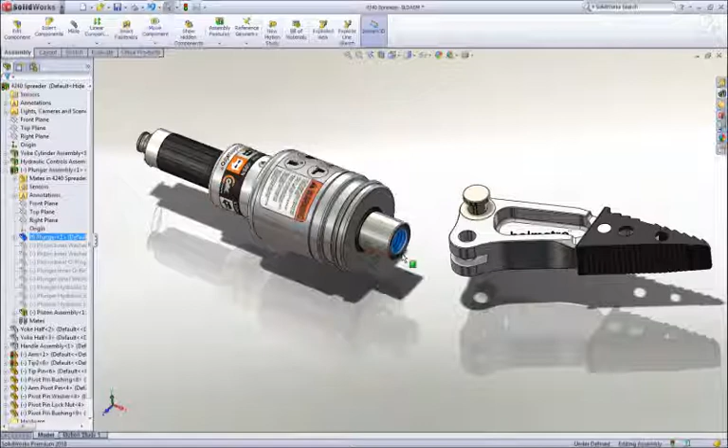We'll create a part, assemble several parts, and create some drawings. We'll start by designing a new rod end part to connect the piston rod to the spreader arms.

The basic building block of a 3D solid model is a sketch, and sketching in SolidWorks is extremely easy and intuitive. Using a mouse gesture, I get access to my most commonly used commands. Draw a slot, add some dimensions to establish its size, and then drag the center of the slot onto the origin to locate it.

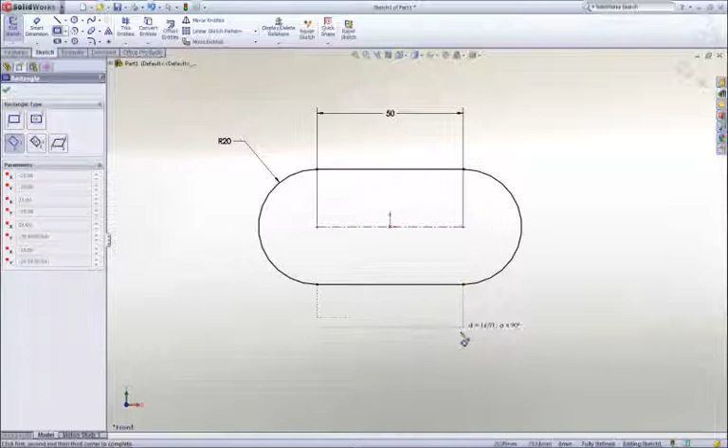Next, a rectangle is drawn using one of the many sketch tools, and then we will add a couple of circles to hold the link pins. The two circles should be the same size, so a quick window selection reveals a pop-up toolbar, and an equal constraint is added to lock their size together.

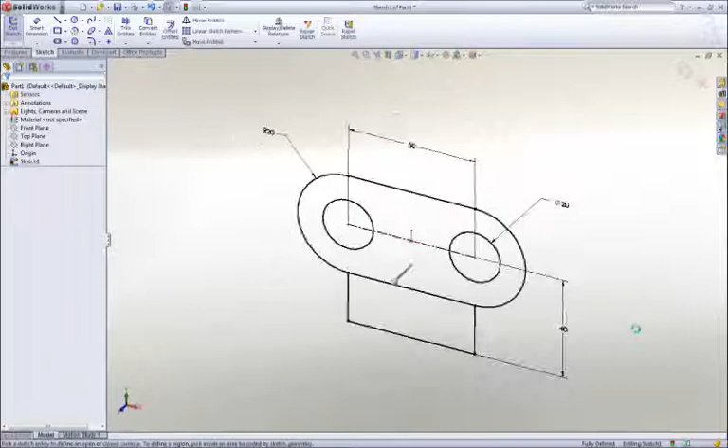Notice that as I work, all of the commands and tools are right at my cursor. We call this our heads-up user interface, which is designed to keep your focus on the screen to make you more productive. Now that this 2D sketch is finished, let's make it 3D by extruding it.

It can be extruded in either direction, or in this case we will extrude it 40 millimeters, about the midplane. To smooth some of the sharp corners, we can add some fillets. Their size can be graphically manipulated on screen, or we can key in a dimension to add some precision.

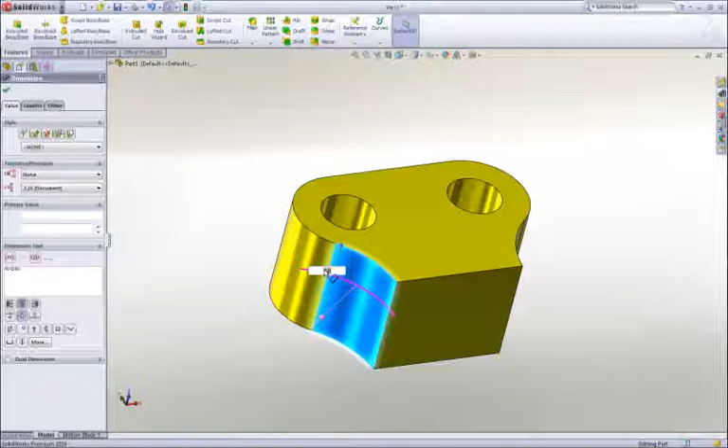Let's add a pocket to the center of the part to accept some links. This time we will use a center point rectangle to capture symmetry while we sketch, and a dimension to control its size.

Using Instant 3D technology, we can add material by dragging the sketch away from the part or remove material by dragging into the part.

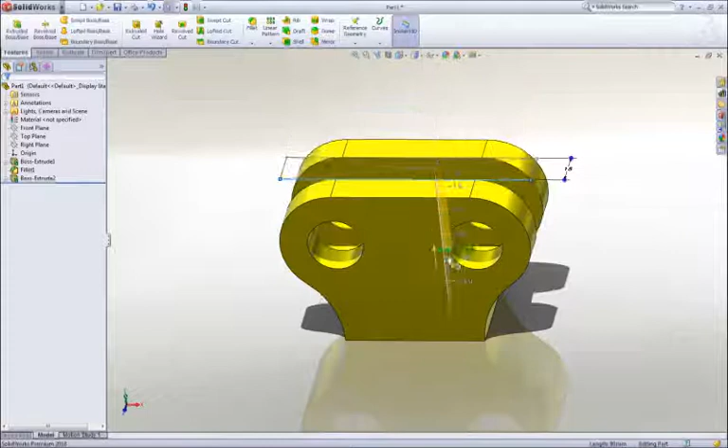The sharp corners at the bottom of the pocket can be rounded by adding another fillet. 2 millimeters would be good.

Finally, we can ease the outside corners with a chamfer. Using the on-screen feature callouts, we can easily control its size while we create it.

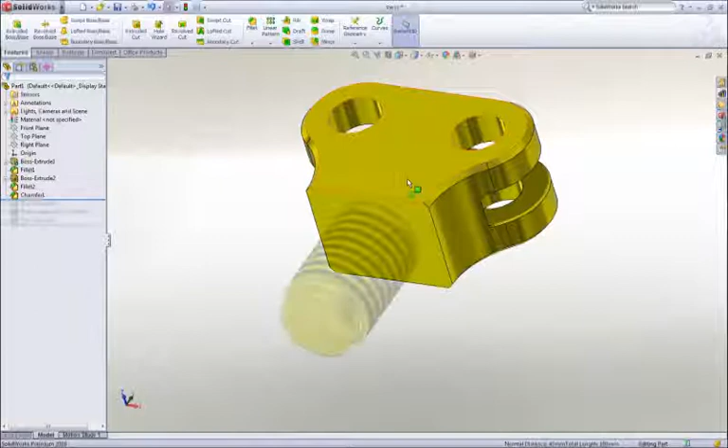Now that you have the hang of it, we will jump ahead a couple features and add a tapped hole at the bottom using the hole wizard. Gone are the days of looking up hole data, because all of the hole types, standards, and hole sizes are available. Choose the hole parameters, locate it, and SolidWorks takes care of adding all of the proper information to define the hole.

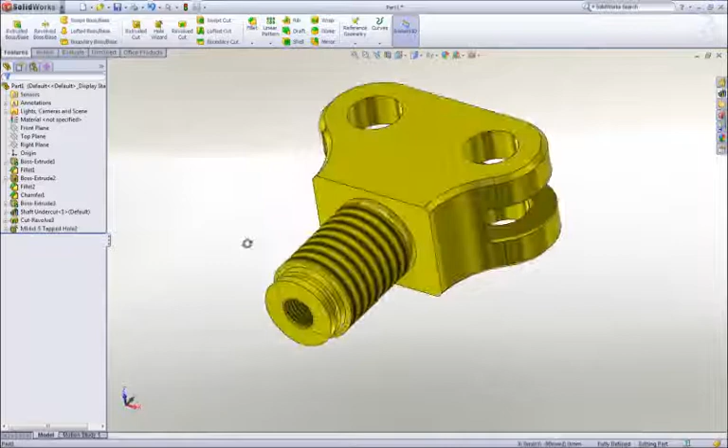Let's leverage our previously created chamfer by dragging and dropping it onto the bottom edge to make a copy. The part looks good, but maybe a couple of changes would help to refine it.

Changing the dimension value changes the geometry, and using Instant 3D technology, dimensions can be dragged and we get real-time feedback of our change. It's important that we fully describe our part beyond just the geometry.

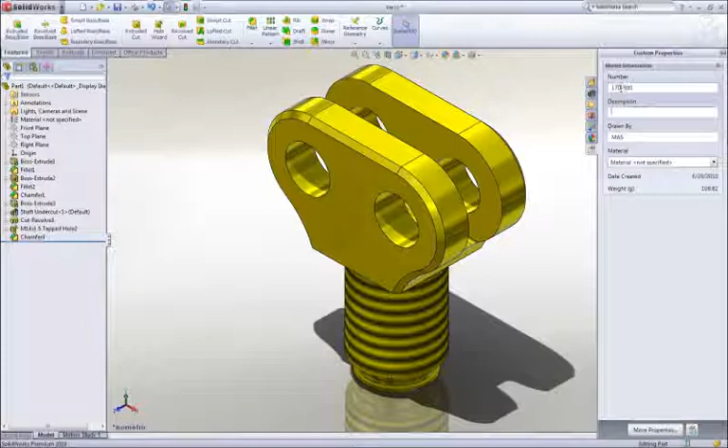Properties such as part number or description can be added and leveraged later in the drawing title block and BOM. Materials can be applied from a list of favorites or from a broad database of materials.

All visual and mechanical properties are applied. Notice that the weight of the part has been updated to reflect the new material.

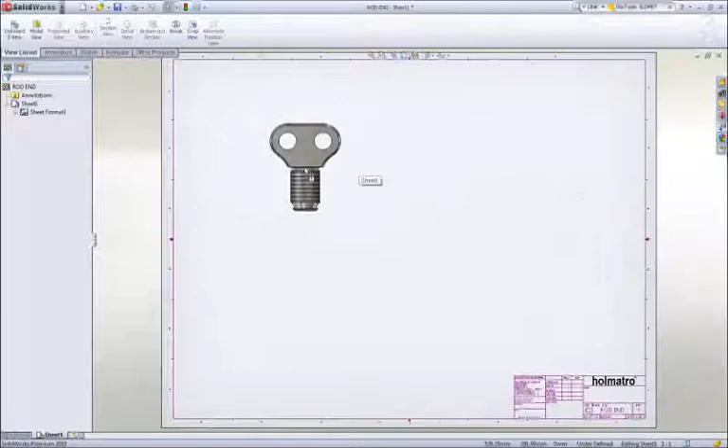To document our design, let's create a drawing. SolidWorks displays the default views of the part in the View palette. We simply drag a view onto the sheet, then we can create any desired projected views, including an isometric.

Hidden lines can be removed or views can be displayed as shaded. For this part, it would be desirable to create a detailed view of the area near the bottom for clarity.

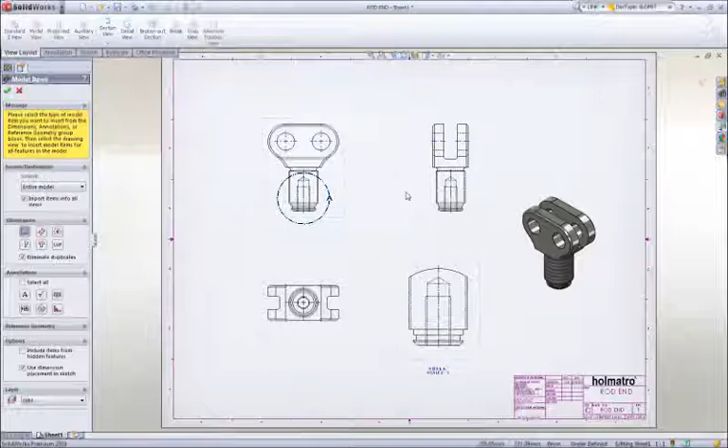Adding dimensions is simple. All of the dimensions that were used to create the part are available to be placed on the drawing. Since symmetry was used during design, we can add a couple dimensions to locate the round boss at the bottom. The Rapid Dimension Manipulator appears to properly place and space the dimensions at even intervals.

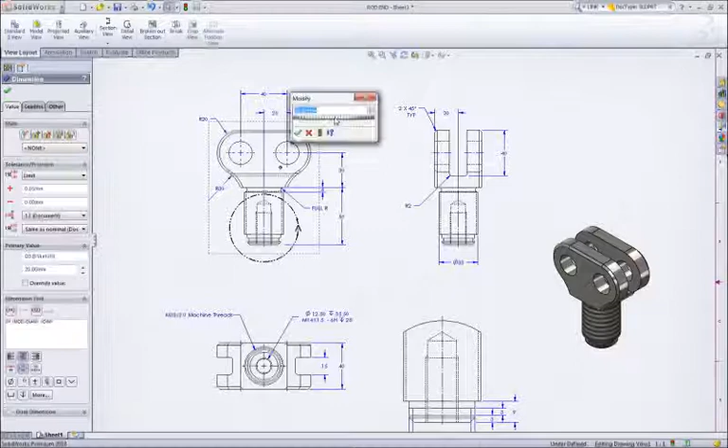Selecting a dimension, we are presented with a dimension palette where we can add more definition to the dimension, such as tolerancing or formatting. These 20 millimeter holes will not accept the 22 millimeter pins we will be using. No problem. Making this change right here on the drawing will update all of the views and change the part as well.

Let's move on to do some assembly work, and with SolidWorks, it couldn't be any easier. For our rod end, simply drag the round boss and drop it onto the cylinder rod. This adds a concentric assembly mate between the parts.

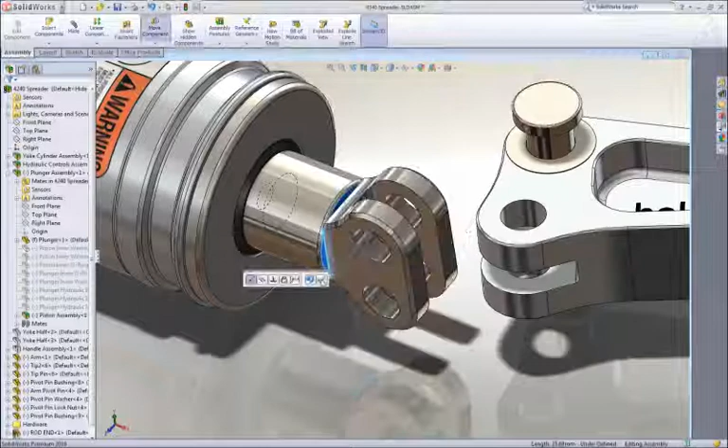To position it along the axis, we can drag the edge of the rod end to the end face of the cylinder rod to add a coincident mate. Next, we will add a link to stop it from rotating. To find this part, we will enter link in the search assistant.

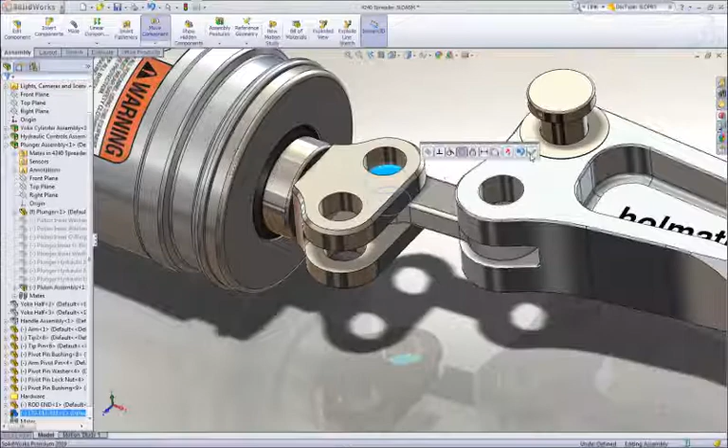SolidWorks not only returns components with link in their file name, but also digs down into the part properties to find the term. As before, we can drag this link from the search pane and drop it on a circular edge of the arm to locate it. Then, using the same drag to mate technique, we can hook it to our rod end.

From the same search pane, we can assemble the pin. This pin was modeled for multiple uses and contains many sizes or configurations. We simply choose the diameter and length that is desired, and SolidWorks builds the part to specification.

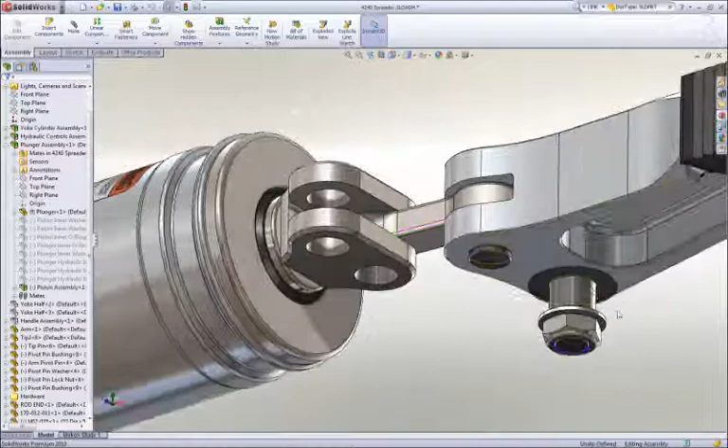Most assemblies contain many hardware items like screws, nuts, washers, and the like. SolidWorks provides a toolbox of such items containing thousands of parts with millions of configurations for your use. Notice that as we assemble the snap ring, it automatically sizes itself to the shaft on which it is placed.

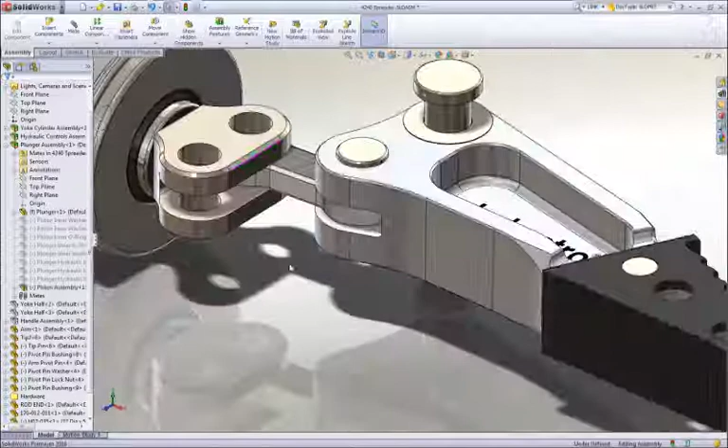SolidWorks allows us to copy parts along with their mates, which is a big time saver. Simply identify the hole and mating face for each hole where the pin is to be placed.

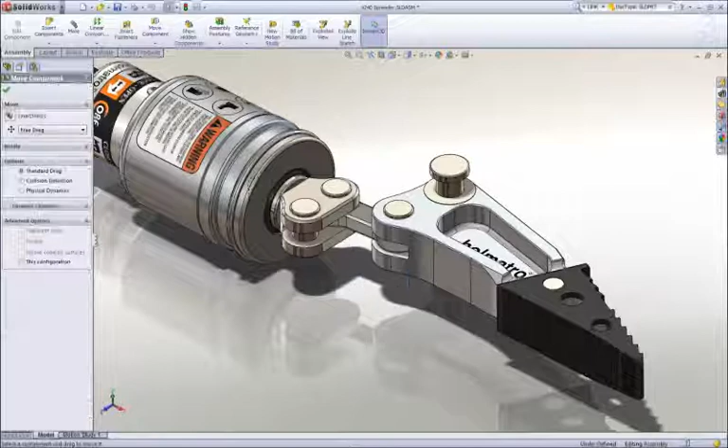As you can see, these pins are too long for the rod end. Remember, the pin was modeled in multiple sizes, so we can easily change the length of just these two without having to reassemble.

Interference detection is an important aspect of 3D design, and SolidWorks takes it a step further with real-time collision detection. Notice that as we move the arm through its range of motion, it interferes with the link. SolidWorks provides both visual and audible feedback of the collision.

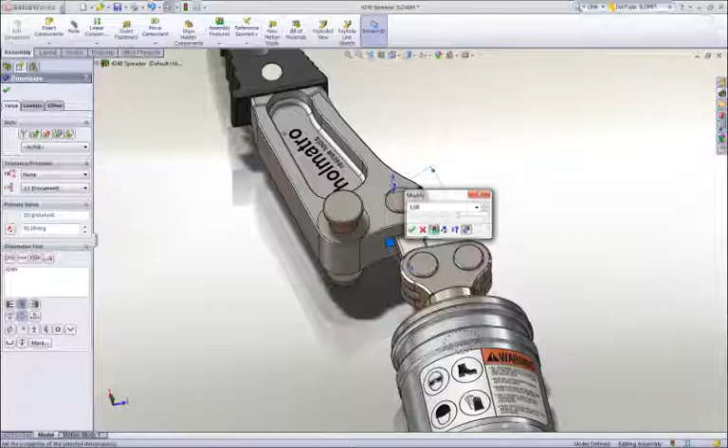A change is in order, and it can be done directly on the part right here in the assembly by changing the angle dimension defining the pocket on the arm. Now, as we recheck for collision, we can see that we have full range of motion with no interferences.

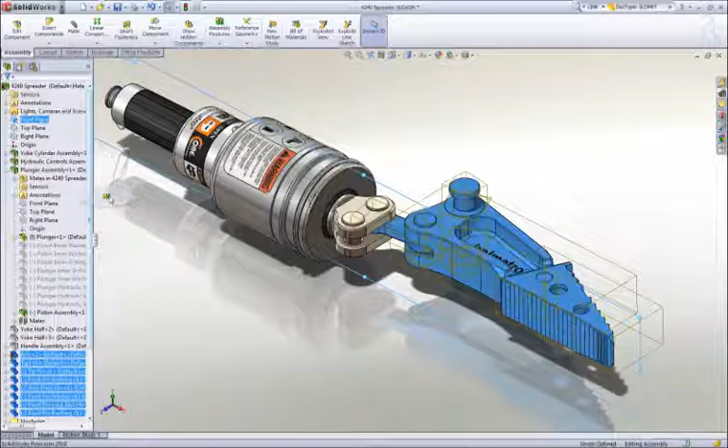Half of the spreader is complete, and we can save assembly time by mirroring the parts about the central plane to the opposite side. SolidWorks allows us to verify and change position of each part, and even to create opposite-hand versions of individual parts.

In just 2 minutes, there were 19 parts added to this assembly, and our assembly task is complete. Let's turn on the parts that we have previously hidden and document this assembly. We'll wrap up the demonstration by creating an assembly drawing.

As we did when creating the part drawing, we can drag the required views onto the sheet. To better describe this spreader, we will use an exploded view of the assembly.

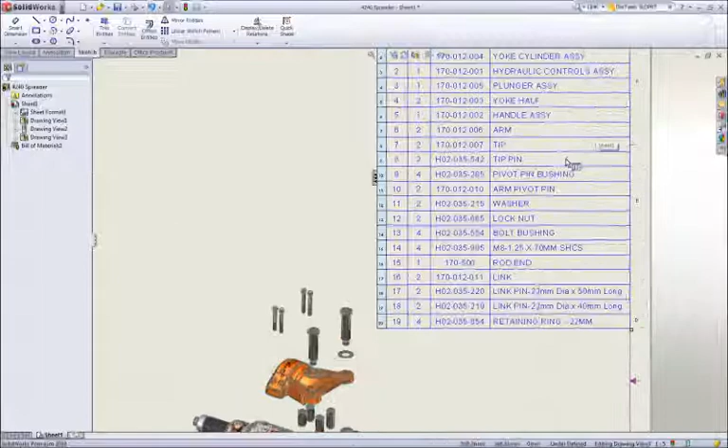No assembly drawing is complete without a bill of material. SolidWorks itemizes the parts, extracts information like description, and adds the appropriate quantities. No bill of material is complete without balloons, and they can be added automatically.

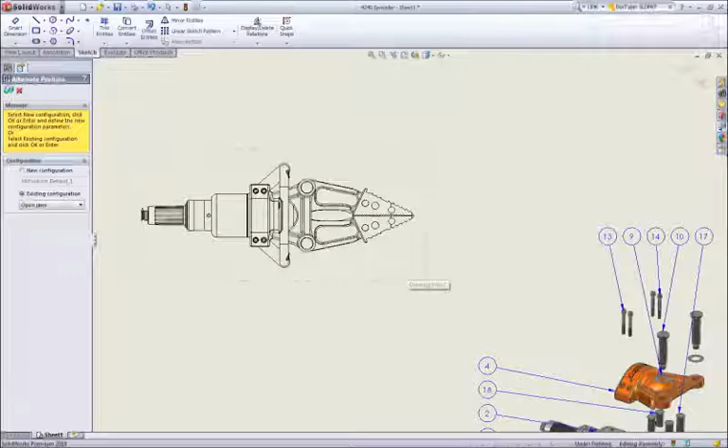To depict the motion of the spreader assembly on a 2D drawing, we can add an alternate position view to describe the assembly in both the open and closed positions. Add a couple of reference dimensions, and our assembly drawing is complete.

We strive to deliver simple but effective tools to help you design better products faster. When you have an idea for a great product, SolidWorks provides the tools to design it in less time and at lower cost. This has been your first look at SolidWorks. To learn more, contact your local SolidWorks reseller or explore our website for more information.